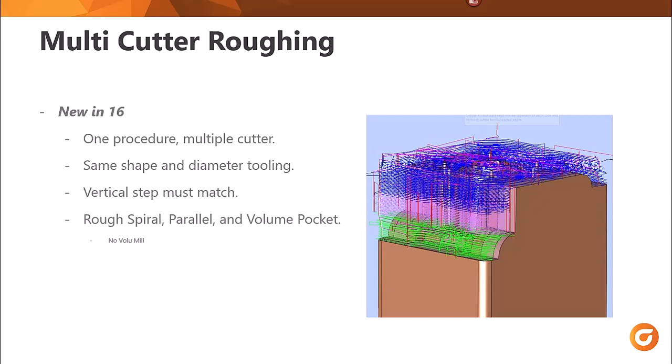So we'll start with a basic file here. We'll go ahead and just see how this gets set up. Fairly standard part with some pockets here, nothing too fancy yet. I do have it set up how I normally would. I have part, it's already on its own set. My cover faces, those are on their own set. So just part of my file setup that is organized already. Let's go ahead and grab a roughing template here that has most of the settings I would normally use.

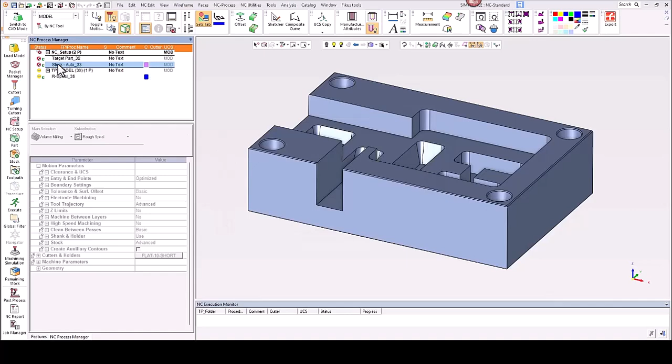My stock and my target part, I'll go ahead and run those. Let's take a look at this rough. So I have a cutter in here that I would machine with. My surfaces are picked, my tool trajectory is set, and then under entry and endpoint, this is the only thing I need to make sure of. We have some choices. Right now it's set to no plunge.

For showing the multi-cutter rough, I'm going to go ahead and leave this on optimized, set it to 1 degree. So we have one tool that's going to come in and rough this all out.

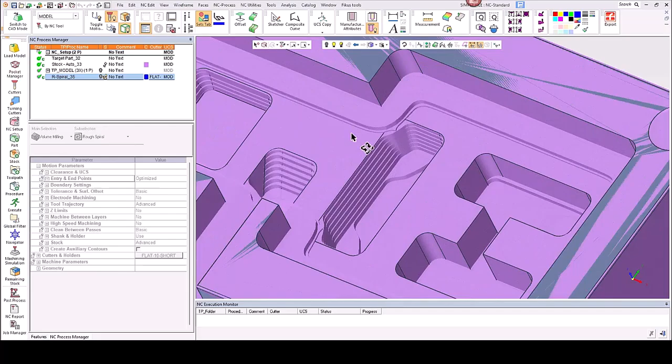All right. So when we look at this, we can see, hey, there's quite a bit of material left behind here. It didn't get cut all the way out. And we can make more procedures and we can step down the tool size and keep doing that. But really, what we're going to go with is the multi-cutter.

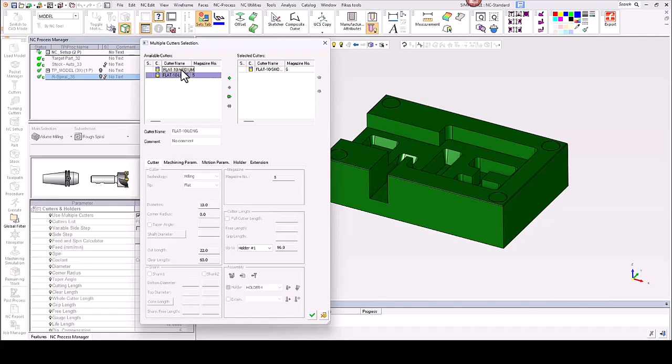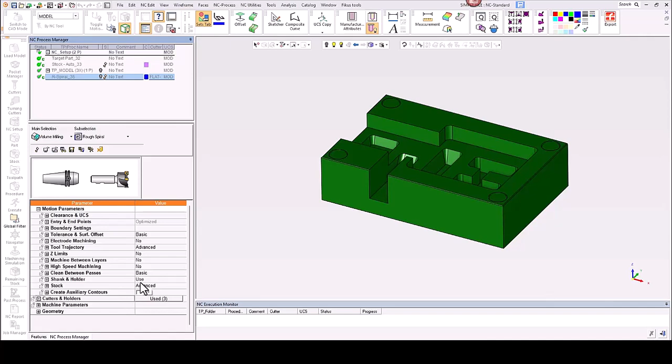We'll come down to the cutters and holders, and we will check the box to use multiple cutters. When I do that, I can come back to my cutter selection, and I'm allowed to pick through other tooling that is the same diameter and the same shape. So I'm going to send these other two cutters over. Green check. And you can see if we decided we wanted a variable side step, we can turn that on and we can enter the value in a minimum step. We won't do that for this, but simply enabling additional cutters, selecting them, and now we calculate.

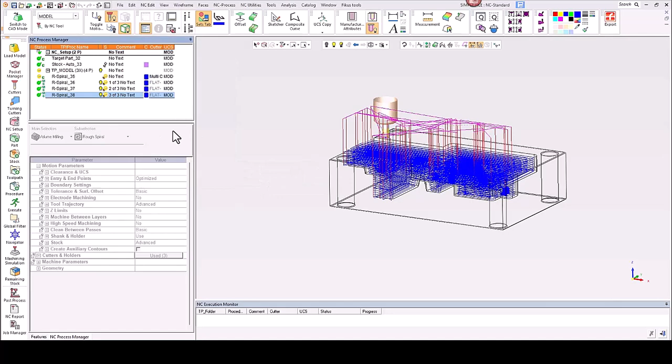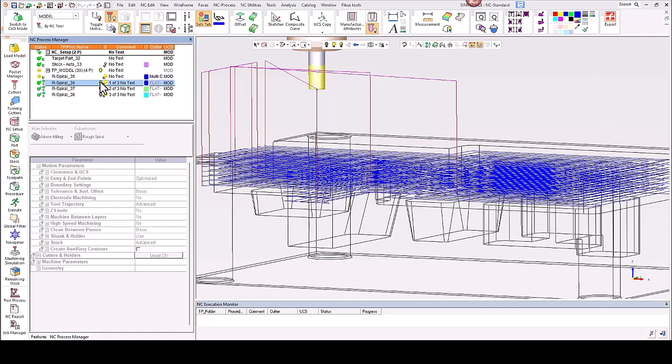We can highlight the procedure, go to NC Edit, Other, divide procedure by cutter change. Now we can break these up, assign a different color, and we can see the different tool usage when we get in here. So if you're looking to see what's machining where, this is a quick and easy way to do it.

And then the order of that machining is controlled by one variable inside of rough. If we go to tool trajectory, if you switch from basic to advanced, the optimized by is set to fewer cutter changes. If you choose, you can select use shorter cutters. The priority will always be to use the shortest cutter, even if it means more tool changes. So if your focus is on just keeping the sturdier tool in there, this would be the option to use.

So multi-cutter roughing, not a lot to it, but super useful. And it works in conjunction with the next item we're going to look at, which is automatic pre-drilling, because these options can work together. Let's take a look.

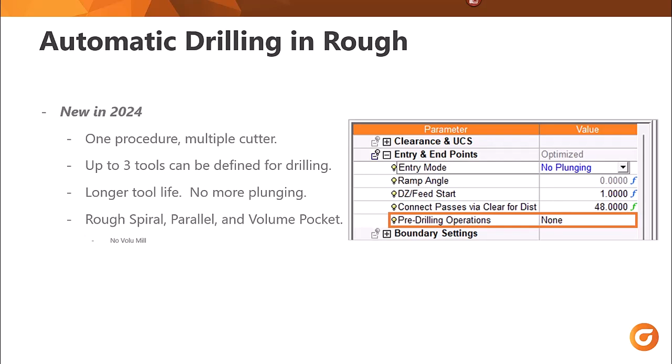Automatic pre-drill is brand new in version 2024. Some roughing cutters are terrible at plunging, which forces the entry move to an angled ramp. For some tooling this will shorten the life in addition to taking longer to cut. Having the ability to drill a start hole in the optimum position will solve this problem. Automatic drilling in roughing can do this, utilizing up to 3 separate tools in addition to the roughing tool itself.

Some things to consider: for our entry motions, we need to make sure it is always set to no plunge. There are some instances where drilling is not needed, such as when the tool can enter off the part, so it's no longer needed.

Depending on the tool you use for drilling, if you decide to use a normal drill, the tip of that tool can leave an angled stock volume that prevents any plunge motions that would allow the final layer to be machined. So that's something to consider when setting that up.

We can do a final milling helical motion to remove that tip and get the full depth machining.

When the drill cycle is set to first, the drilling will happen first, unless the selected drill cannot reach depth without roughing happening first. The system is smart enough to sort this out.

When drilling, the hole has got to be bigger than the selected cutter; it cannot be size for size. The drilled hole depth, or bottom, is determined by the surface offset. This will prevent machining into the surface as well as give control.

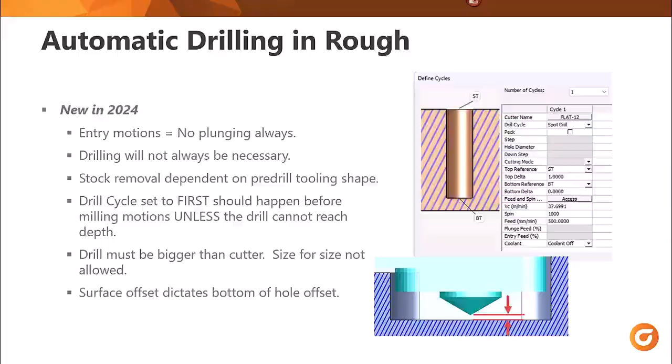Let's look at it in a file. Alright, let's head back to our multi-cutter file we started here, and we're actually going to use this to show the next step.

So we'll edit this procedure. Again, these two tools can work together, both the multi-cutter and the automatic pre-drill. So we're going to leave the multi-cutter turned on, but we're going to come up here to entry and endpoint, and switch this to no plunge. That's the first thing we have to do. Then we're going to set our pre-drill operations here.

We're going to switch that from none to by cycle. Then right underneath it, where it says drilling cycle, we're going to hit define cycle. Now, for those of you familiar with auto drill, this is going to look very similar, except the top and the bottom is determined for you. The number of cycles we want is right here.

We're going to start with 1. I'm going to pick the cutter - we're just going to do a drill, and we're going to do a deep hole peck. Our increment is 1, our top is stock top, the bottom is BT. This should all be pretty standard here.

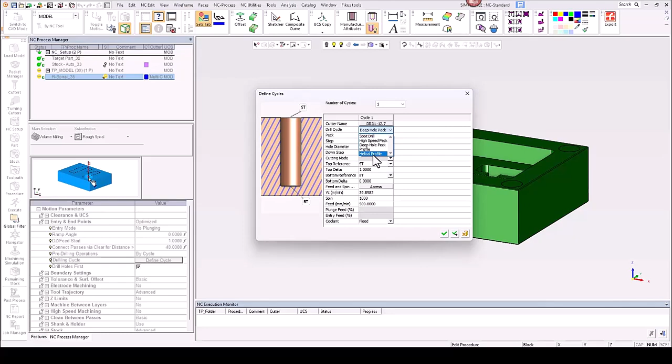So just like a cycle in auto drill, other than the cycles listed here are fewer - the only ones listed are relevant to actually doing the pre-drill cycle, and that's it. So let's green check this, and again, all we're going to do is calculate. Nothing fancy here.

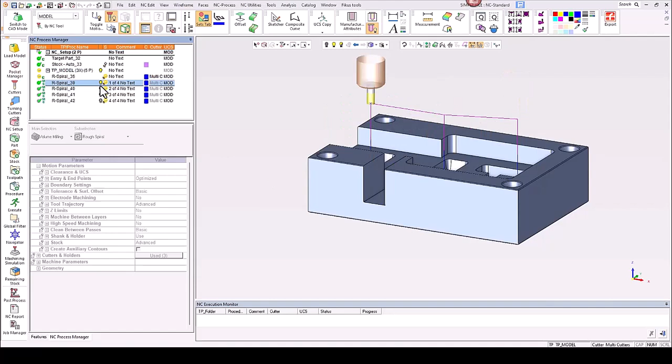Now if I divide this out by tool, we can see our first cutter, right here, is our drill. It's gone and found the areas it needs to move material out, drilling them first, and then machining from there, each layer. So these two techniques work together.

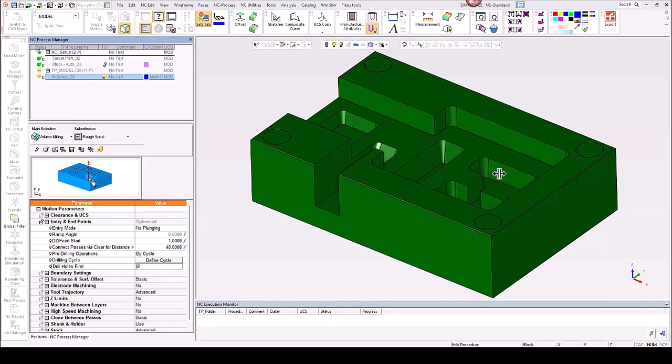Now let's look at this a little closer. In here, one thing you'll notice is I have drill holes first checked. This doesn't have to happen, but assuming I have this checked, it will drill where needed, as long as the tool can reach first. If the tool cannot reach full depth, a layer will be machined before it comes in and tries to drill that area. So that's one little thing to keep in mind.

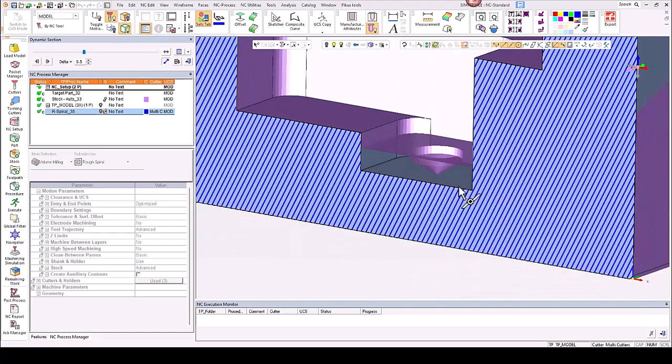And then let's look at the actual stock result here. I want you guys to see what this looks like. You can see we have material being left in the bottom of this pocket, this one, and this one, and it shows it best right here. The shape of that drill is leaving material on the bottom, and because we have set to no plunge, it cannot machine that final layer without violating that rule. So something to keep in mind - you can see it in each of these pockets.

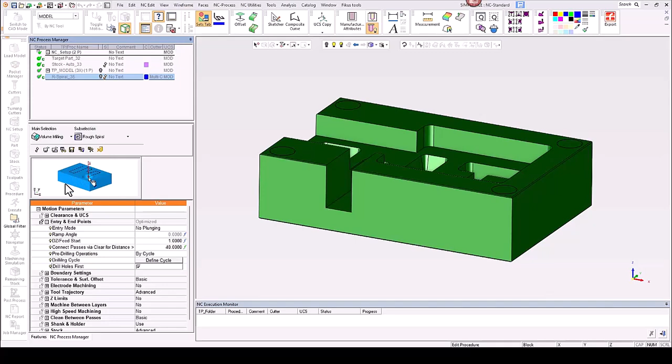So what we can do, there are tools to handle this. When you're in here setting this up, we go to entry and endpoints, drill cycle, define cycle. Number of cycles, we can set this to 2.

So a couple of options. First, we could have a drill that is a flat drill. We could machine the bottom flat. Depending on the depth, that would affect your selected tool there. In this case, we're going to go ahead and say a long 10 millimeter.

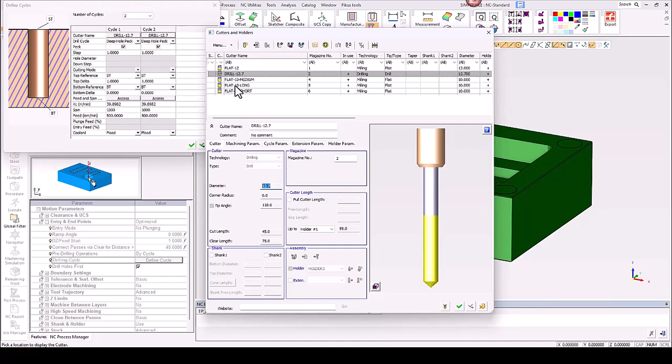For the drill cycle, we're going to pick the helical profile. The hole diameter I do have to type in. This is going to be whatever my previous drill was that I opened it up to. In this case, it's 12.7.

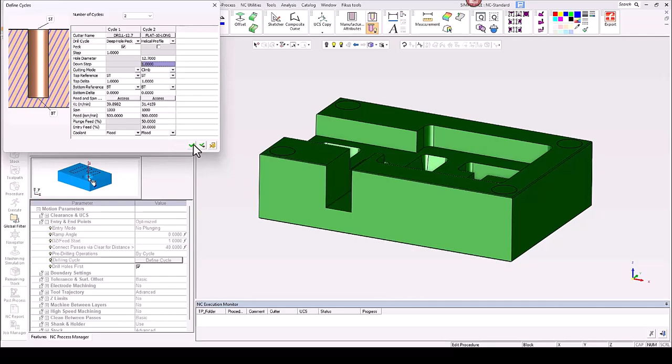Down step 1. And all of that should work. So now we'll go ahead and calculate.

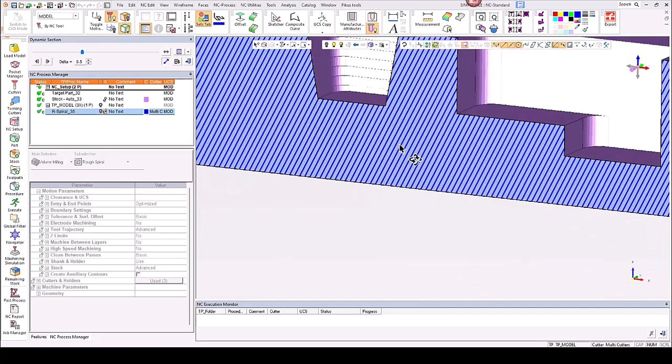All right, let's look at the stock again this time. So this time, if we look at each of these pockets, we are machining all the way down to that final layer, and it's because we removed all of the stock out on that pre-drill hole. So now the cutter is able to plunge and fully remove all that material.

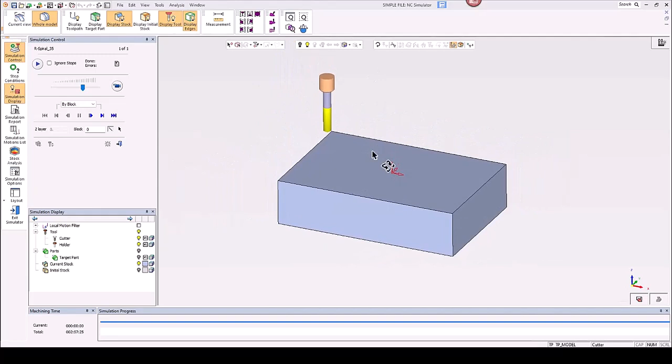And when we look at it in the simulator, we can watch this work. You can see it's done our drill. It's done the helical. We'll speed this up.

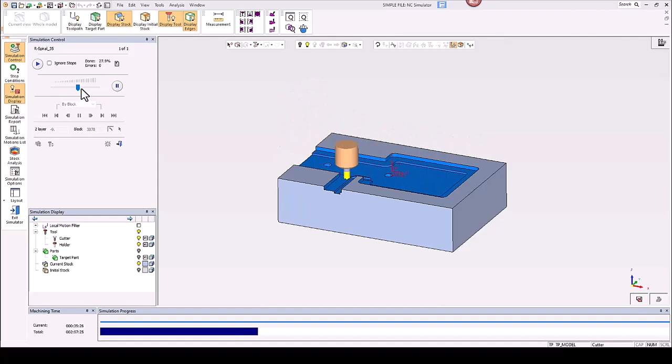You'll notice that third pocket over there, it's going to do later because it can't reach. So it's going to come back and do that after it's removed some of those layers. It's smart enough to figure that out for us.

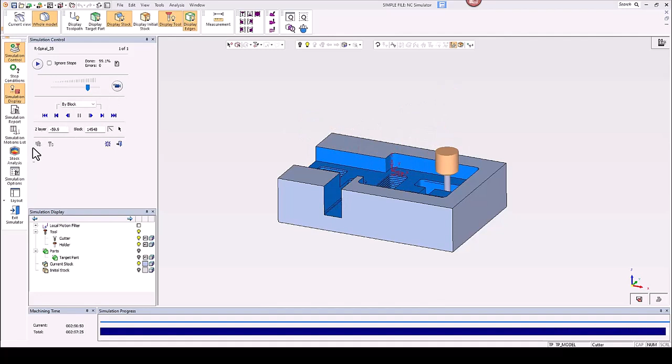There it is doing that hole. And then again, because we're no plunge, it's only using that hole to get started. Let me switch this show for you guys so you can see it.

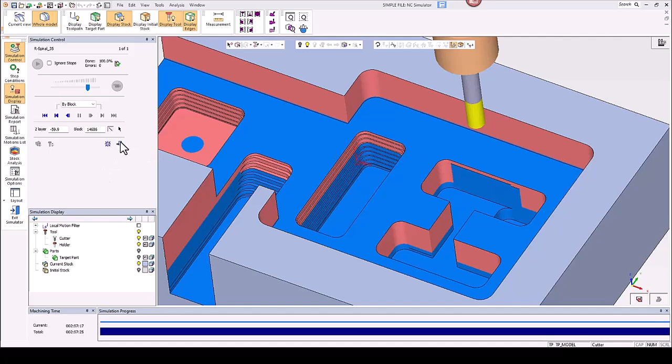Based on tool here, now we have machined all the way out, and it drilled this hole last because it knew that that was going to be a problem for the tool reach. So really smart tool, very useful, and both of these options work together.

Now let's look at this on a little more complicated part and how some ways to template this, because a lot of times we hear, I can't template this, my parts are too different. You can almost always template something.

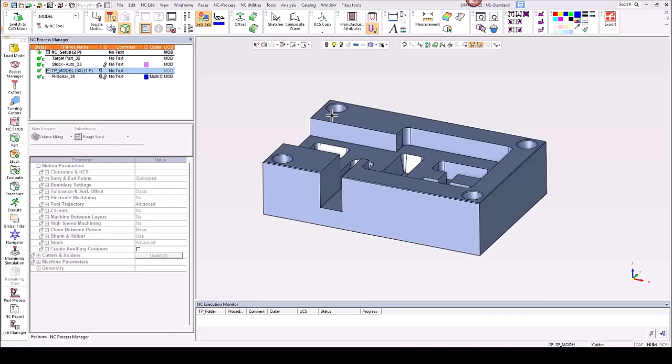It's a matter of how you set up and the end goal. When you template, it does not have to accomplish machining the entire part. The idea is to do the least amount of programming and get it to the machine as quick as possible. So let's look at some ways to set this up.

All right, so we'll start with this part here. We've got a cavity here, and we're going to just look at file setup a little bit. I'll show you my sets here, and these are all just something you can set up however you'd like. In my case, my default NC file always has a part set, always.

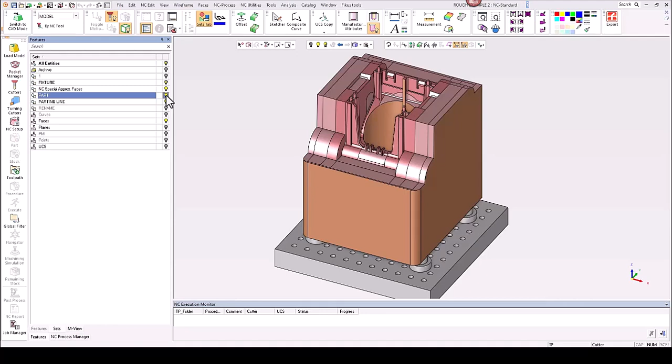When you do these, you can make them, you can assign them by criteria. There's a lot of ways to do this. You can assign it manually. In my case, it's set up, and I have a fixture set as well.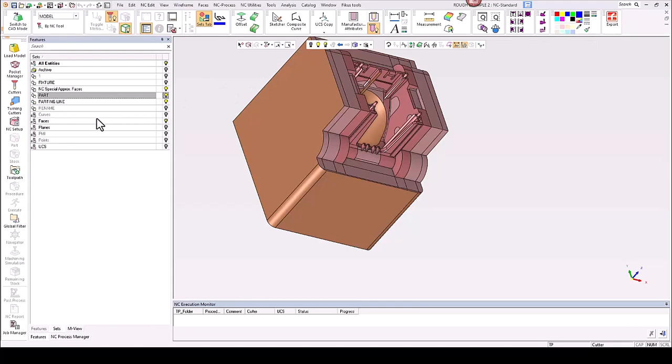So all these are automatic. One other thing I like to do is I'll turn on my part, and I will hide everything that is not parting line, and then I will assign it to a parting set. So it's easy to quickly grab just that part detail, everything other than the outside inside of the part.

So something that I like to have for programming. And then the only other thing I'll include a lot of times is a covers set that includes cap faces and things like that. So having that set up, let's look at just a basic template here.

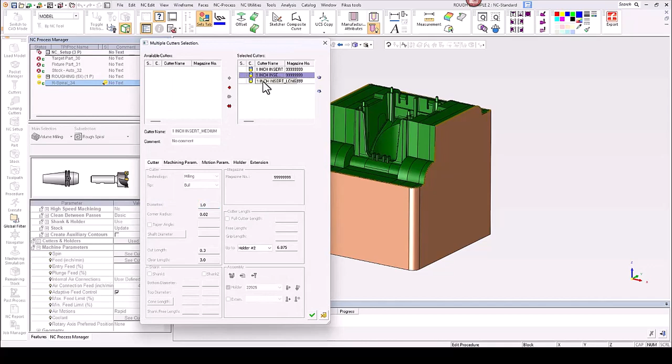So I should have a template that has a combination of both the automatic pre-drill. In this case, it's set up, I have a center drill, a drill, and a 1-inch insert. And then for my roughing cutters, I have 3 cutters that are 1-inch inserts. Now what this is doing, I have safe milling on.

So this is automatic, I don't have to pick this because the part's defined. The part surfaces are selected by criteria, and they are selecting the parting set. So all of this is automatic.

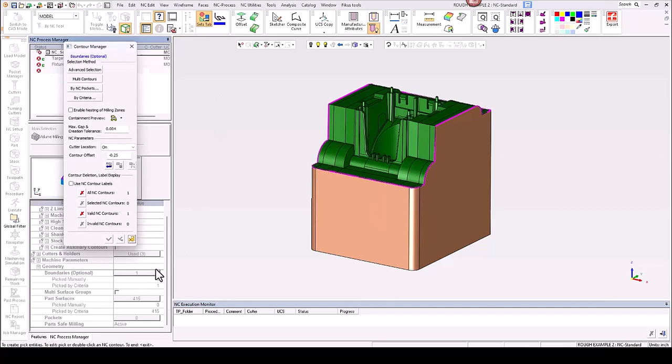For my boundary, I am selecting that by criteria. I'm saying outer only, and again, having that set predefined makes it really easy to grab this. So basically, I just apply this template.

Right off the bat, my part, my fixture, my stock, and the first bits of removing the stock material from the part are done and ready to go. So I would bounce over to the next file while this is calculating, get started on the next part. It's a really fast, efficient way to get started and get things going to the machine.

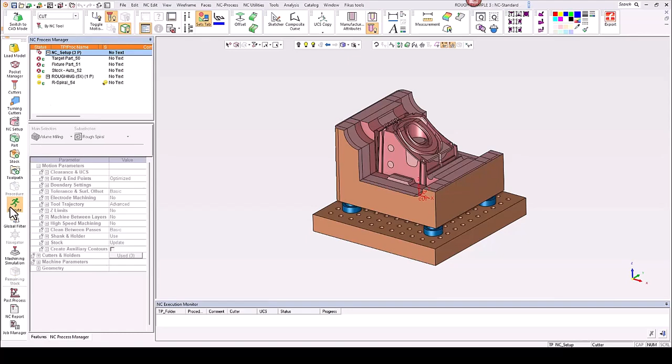Now, we would think this won't work on anything else in some cases. Well, if we go to the opposite half, this is a very different part. I can again come over here, go to the template, apply that exact same template, even though it is the other half, and execute. We'll let that run, and then we'll come on back. Now, if we look at this one, while that other one's thinking, let's go ahead and simulate this.

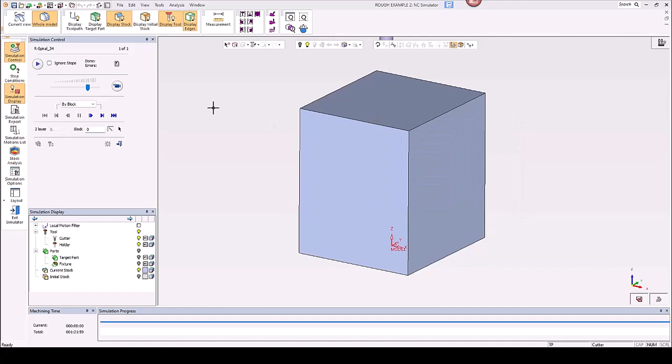All right, so we'll start running this so we can see that it's machining down the first layers here, as far as that can reach.

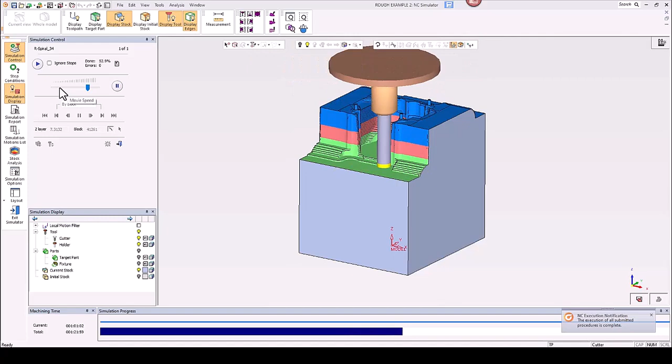There's our third tool. There's our drill. So that's going ahead and it's reached down, it's moved a lot of that material out so that my tooling can actually reach to clear that area out. So now we'll continue.

It's reaching as far as it can until it has to stop. Now it continues machining now that that material is cleared out.

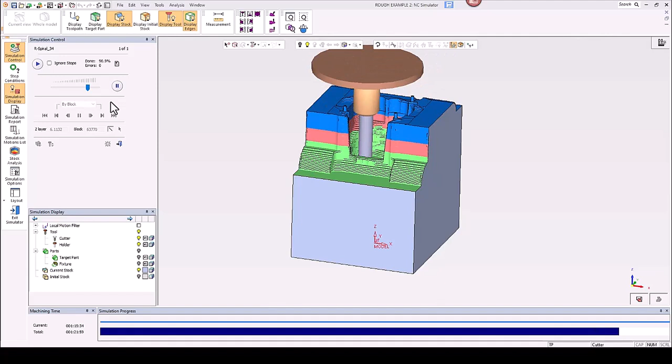So this one procedure has done multiple roughing insert tools, and it has drilled and milled to clear start holes for all of those. So I haven't plunged the tool at all.

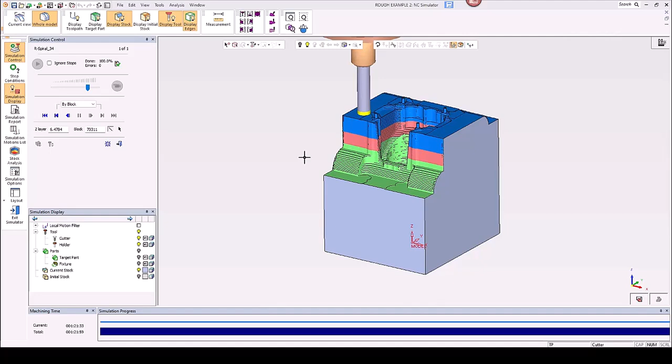And then this all works going right over to another file. Same template, same approach, very quick programming. Milling that hole out.

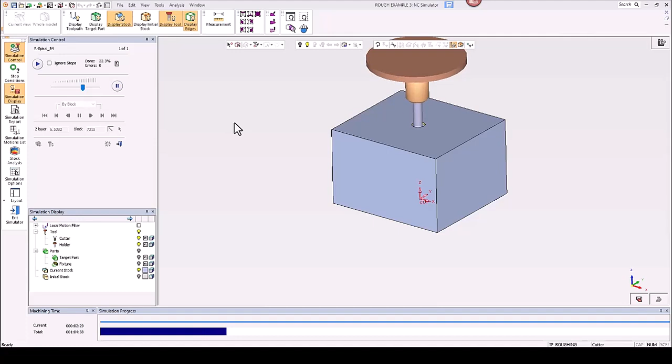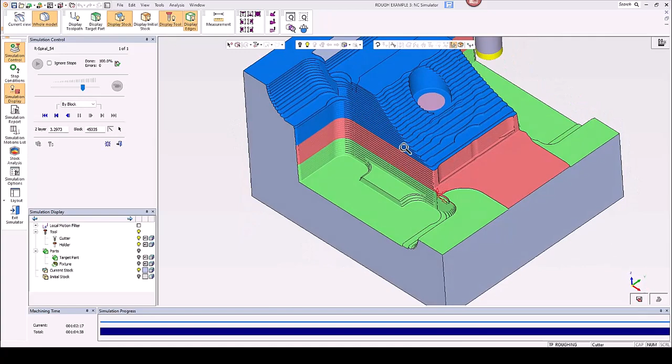So we see second tool, third tool. So in this case, this one procedure again has done drilling and milling with multiple tool lengths. So taking just a little time to organize our work and set up a file can go a long way.

And the other thing we should consider, this tool is using a 1-inch insert. I could have several of these procedures and they can just be different tooling. So maybe I start with a 1-inch, go down to a 12 millimeter, go down to a 6 millimeter, and then if there's nothing to cut, it won't cut it. So some really nice options in here on ways to efficiently and quickly remove this material.

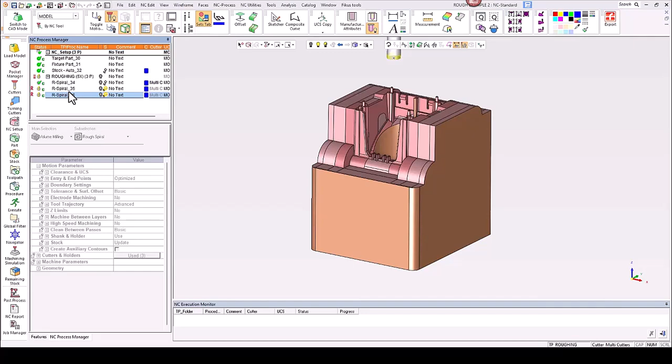Last thing we'll look at here is the Connect site and how to log a ticket, the best way to reach out to us. When we get here, it will ask you to register or sign in. I have already registered, and if you have not, go ahead and get signed up. Any trouble at all, reach out to us at support.

Once signed in, you can go ahead and click on support cases. And then once you're in here, we can go ahead and click on new case. We'll give this a title, test ticket for webinar.

We can select our priority and we can say it is a medium priority, and say sending NC file for help. We'll just pick something. The more details you provide, the better off it is.

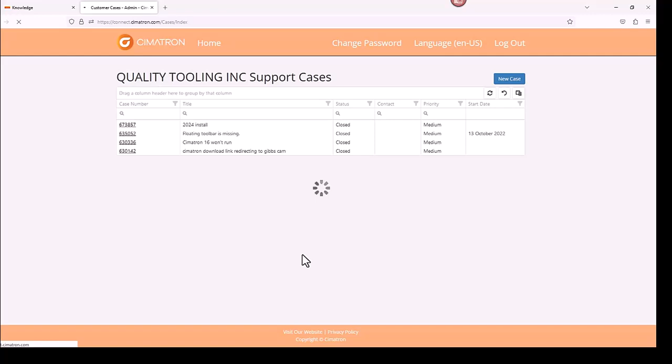Once we've put this in, we can go ahead and check out our files here. If we want, we can select and we can go ahead and grab an NC file and hit open and upload. This is a really good way to share files and get things to us quickly so we can check it as soon as possible.